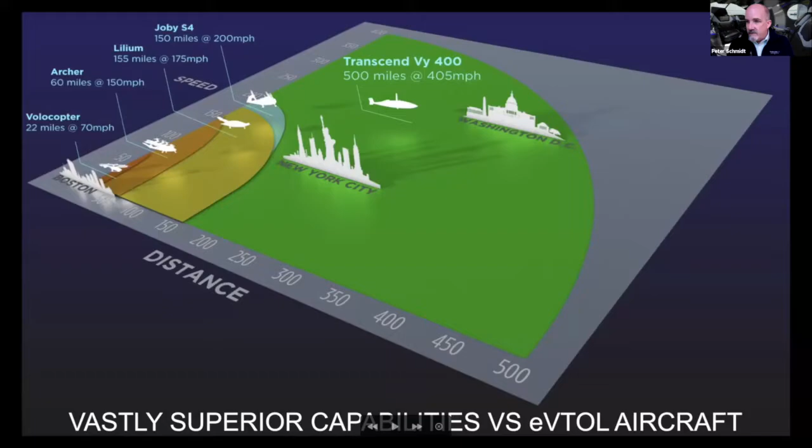So we like to say that the Vy400 is using proven technology to build a disruptive aircraft. And disruptive of what? Well, disruptive in entrepreneurial terms. Disruptive of existing markets. So we're going after fast, convenient, affordable regional air mobility. So what does fast mean? Well, 405 miles an hour, 352 knots, 652 kph in airplane mode with the wing tilted down.

Convenient. Well, one of the key things I learned at Linear Air is activating travel demand on aircraft at this scale using reliever airports is really challenging. We tried very hard. And what it comes down to is there just aren't enough people living around any given reliever airport to let you fill the seats, offer a dense schedule, and keep them full.

VTOL is the key to unlocking the center of cities. We can operate out of city centers, and obviously that's where all the people are. It's like what Willie Sutton said when they asked him, why do you rob banks? He's like, well, that's where the money is. So why do we want to use VTOL to serve city centers? It's where the business travel demand is to start out with.

And then affordable. Surprisingly, since we're all used to jet-powered aircraft, especially small ones at this scale that look cool, being expensive, it turns out that taking advantage of the VTOL architecture and going fast, with a similar sized aircraft with one turbine to a Bell 407, we can cut the per mile direct operating costs 50% versus a Bell 407. And I'll talk some more about that.

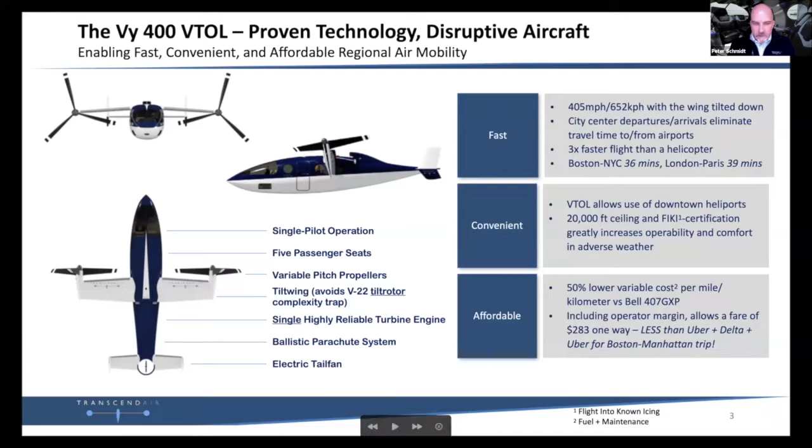Let me dive in here. So I'm assuming you have, in fact, heard about these eVTOLs. If you haven't, then my apologies for these next couple slides. But I've learned from talking about our aircraft over the past several years that everybody has a lot of built-in assumptions from what they've heard about eVTOLs, and I need to deprogram you from those assumptions in order for you to appreciate this aircraft.

So this is a projection of battery capacity based on historical trends. In the second half of the 20th century, batteries grew at 3% a year. That's the red line. When lithium-ion batteries first came out, there was a decade where they grew at 8% a year. That's the yellow line. And then there was a period where NiCad batteries grew at 5% a year.

So depending on which growth curve you want to project for where we are today into the future, you get different time frames before batteries are good enough that you could fly a high-speed mission with them and get some range. And that's approximately 1,000 watt-hours per kilogram, that green line there. So you see it's 2041 until batteries will be good enough where we might consider an all-electric Vy400.

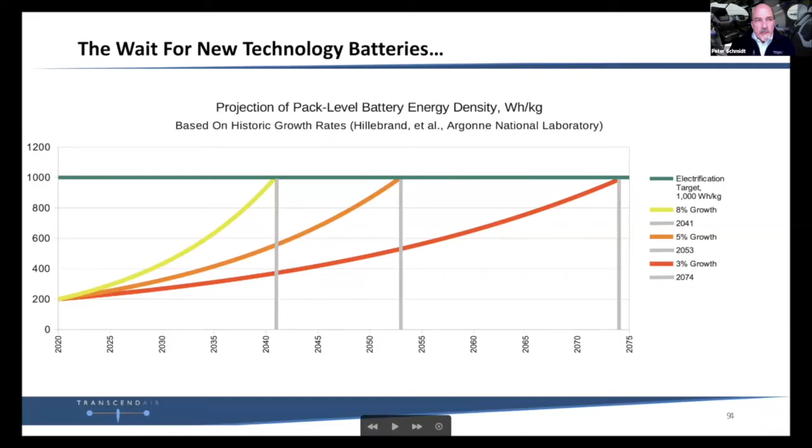So our position is that we don't want to wait 20 years. We've got an aircraft design we can build now, we can start selling now. So our position is sell aircraft now, electrify later. And if you look at our business projections, we project that we can sell $58 billion worth of Vys in the next 20 years. That's the actual marketing and unit shipments ramp-up graph there overlaid on the battery graph. So we're not willing to wait for batteries to get good enough for our city-to-city mission.

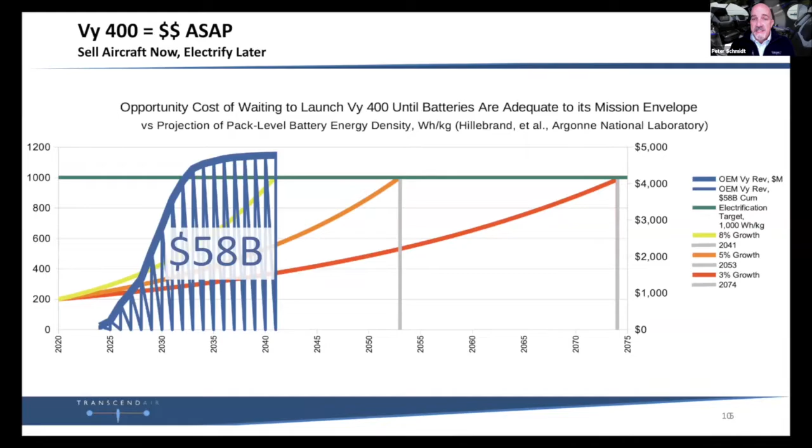So I mentioned that it looks kind of like a V-22. So how does it compare to tilt rotors? Tilt rotors are the only VTOL aircraft that are flying right now, and the V-22 is the only one that's in service. I mean, the only VTOL ones that are not turbojet powered, not counting the Harrier and the F-35, or helicopters for that matter. So what about tilt rotors?

Well, they're complex. If you look in the lower right-hand corner now, you see that's a helicopter rotor head. If you count the parts in that helicopter rotor head and compare that to a variable pitch propeller, there's more than 10 times as many mechanical parts in that rotor head. Whirling around, spinning, twisting, leading, lagging, flapping, you name it, in order to make a helicopter work. And what the V-22 is, is two helicopters that they've yoked together and made tilt sideways. It's a miracle of engineering that it works at all.

But because of that complexity, it's expensive to operate. It was expensive to develop. And it doesn't have a great dispatch reliability in service. It's not where the Marines would really like it. And you know, what's the expense? Well, those are $71 million aircraft. And these drawings are all to scale, by the way, just to give you a sense of the very scale.

Bell is in flight test with the V-280 Valor, which they have aimed at a new Army program. That's going to be a $30 to $50 million aircraft. It's a 33,000 pound gross weight. The V-22 is in the 50,000 pound class. Then we get the AgustaWestland AW609. If its fuselage looks familiar, it was deliberately designed to be like a King Air. They sort of saw it as a tilt rotor King Air. That's going to be a $24 million aircraft. It's been under development for almost 20 years now, or maybe over 20 years. And again, these things are wicked complicated.

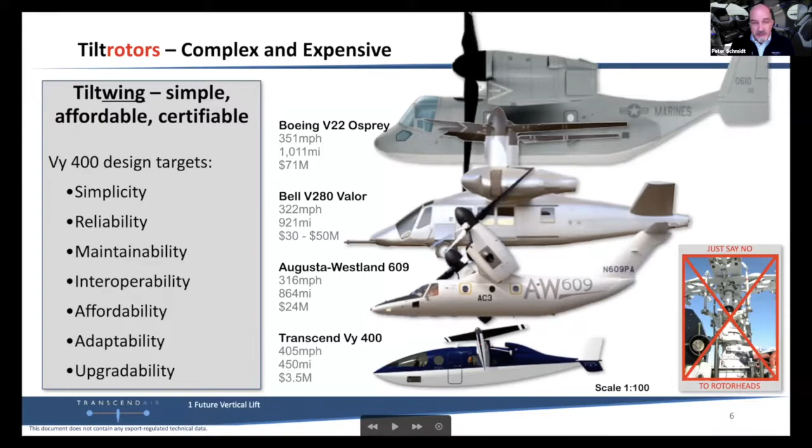And we're not the only ones who agree with that. Abbott Aerospace Canada, which is a very well-respected aerospace consulting firm, analyzed 220 urban air mobility designs, including Joby and Lilium and the other ones on that slide, and us. And they ranked us number one. So we're very pleased that other aerospace pros understand the value of what we're doing and why. And in fact, we've attracted an amazing team to the program. It's all because when we talk to people who are familiar with aircraft manufacturing and real aerospace programs, they get why we've made the choices we do, agree with it, and then they want to be a part of it. So we've been very fortunate that way.

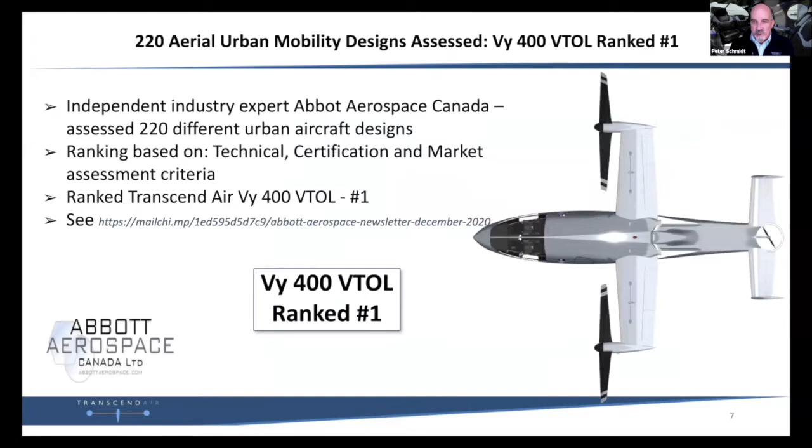So what is our mission? Our mission is to target already proven markets with a low-risk, high technology readiness level design. TRL is a NASA acronym. They have a standardized ranking, and it goes from 1 to 9. And the higher you are on a TRL ranking, the less technology risk there is in that part, that subsystem, or your aircraft. So we've designed an aircraft that's going to fill two proven market needs: VIP rotorcraft transportation and regional airline needs. We've worked very hard with our team of advisors, employees and consultants to make sure that this aircraft is both manufacturable and certifiable.

It's going to be profitable for the manufacturer. It's going to be profitable for the operator. You'll see when I show you more of the interior, it's going to be liked and trusted by passengers. And ultimately, what's most important is it's going to enable lower prices for aircraft and fares on the airline. This business part is not specifically about the aircraft itself, but the reason it's so important is that this is where Greg, my co-founder, and I started with Transcend. Some of you may be familiar with the Eclipse Very Light Jet and the Very Light Jet bubble of the mid-2000s.

I joined Linear Air picking up the pieces. Linear Air was the last independent operator of the Eclipse 500 standing back in 2010 when I joined. And the promise of the Very Light Jet age was based on NASA's Small Aircraft Transportation System concept, which sounds great. You could walk up to Hanscom or Beverly or Norwood or any reliever airport, and there'd be this really sophisticated twin jet sitting there waiting for you, all warm and ready to go, and you could fly off to wherever you want, and it would be inexpensive and affordable.

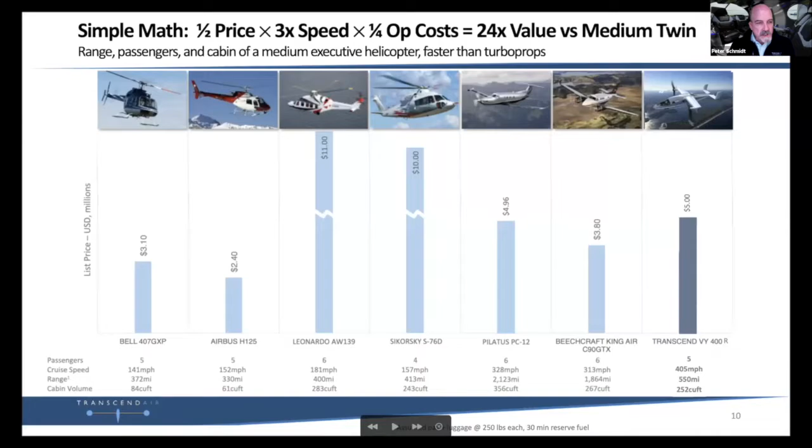And Keith, I'm not monitoring the chat, so if there are any questions at this point, I thought maybe I could pause for a second. No, you're doing such a great job right now with providing information that we don't have any questions just yet, but people should enter them in the chat if they're interested. Yeah, if anything comes up, please do.

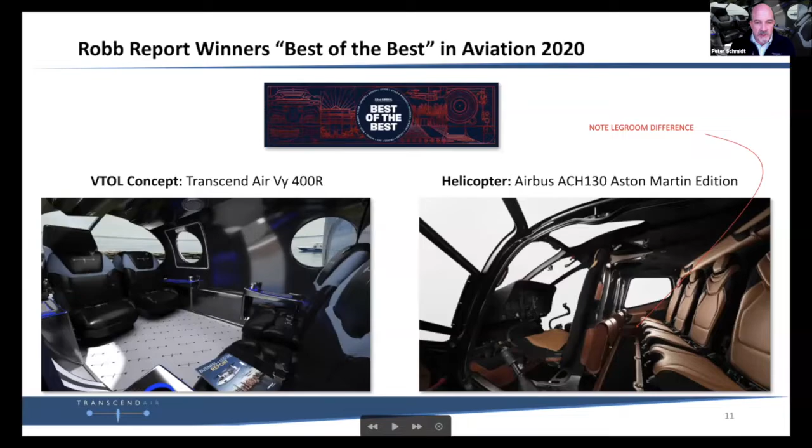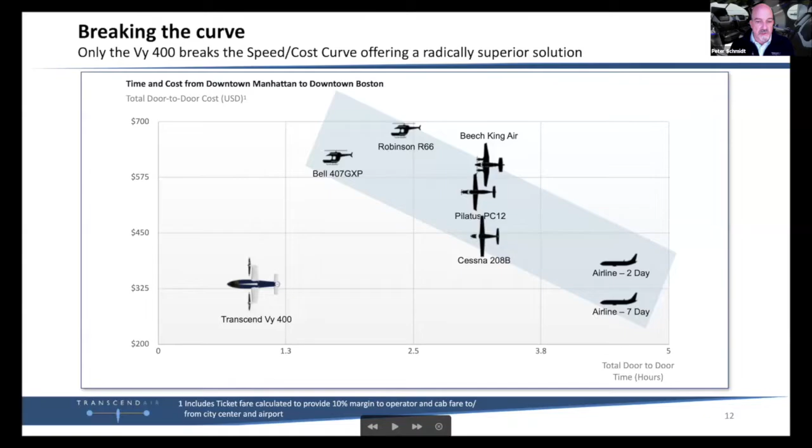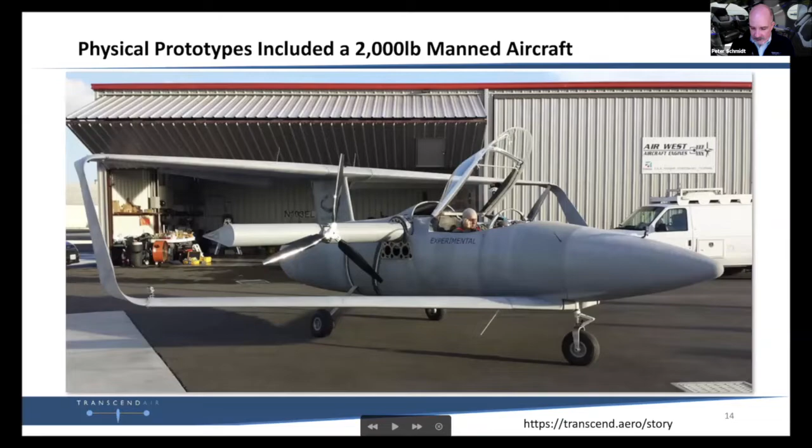And so this lineage of prototypes has been hugely educational and influential in our aircraft design. You can learn a lot from simulation, you can learn a lot from analysis, but you have to fly in order to see where reality really is. And with this lineage, I can say that the Vy design benefits from the reality of flying more different types of electric VTOL aircraft than I think anyone else in the world, including NASA, by the way. So again, that's another reason why we're confident that we've got a real winner of a design here.

And I should stress again, all of those on this page are electric aircraft. Our current 5th scale prototypes are electric. And as David said in my intro, I'm the chair of the Electric Flight Test Committee of the eVTOL Flight Test Council, because we are actively flying electric aircraft now. It's convenient at the 5th scale to do that. So we know very well why electric aircraft limitations are strong right now, and that's why we're sticking to a turbine.

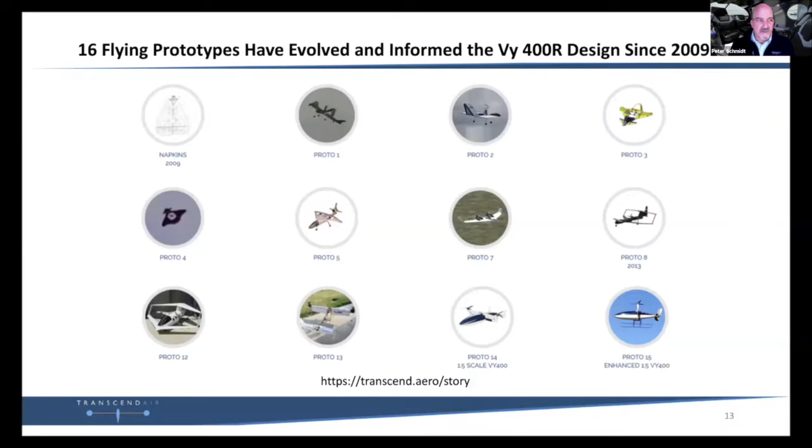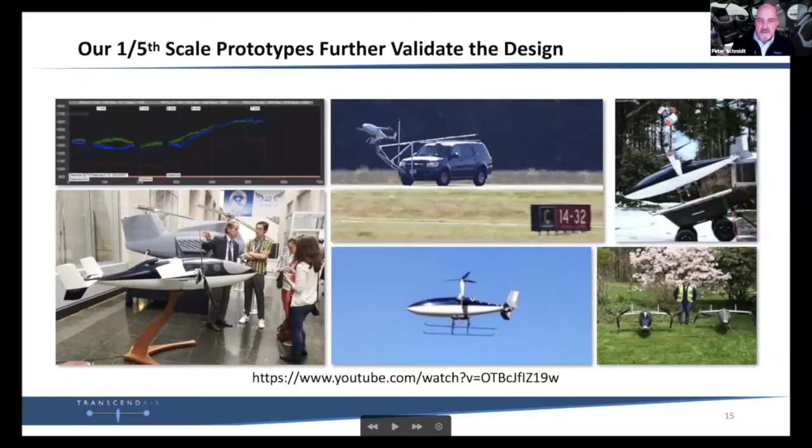So let me show you a video of what it looks like. I'll show you some X-plane simulation videos and one prototype flight test video here. So I'll start with the service video. Pull that up. There we go. So this is Manhattan to Boston. It is a commercial, so forgive me, but you also get to see all phases of flight, what it'll actually look like.

Peter, we're not getting the audio on that. What are you seeing? We were seeing the video, but not the audio that time. Oh, you weren't getting the audio. Rats. All right, let me restart. Oh, it's because I had share sound on. Turn that off. Let's try again. I'll start already in progress here.